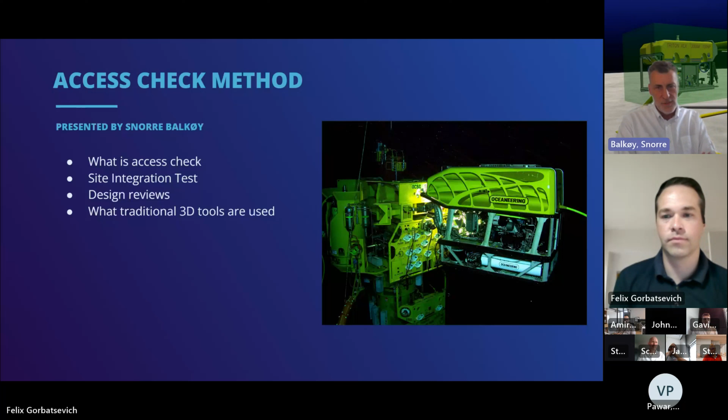What's important to check is that you have the access to get the ROV into the work area, that you can stabilize the ROV, grab on, see what you're doing, and read marking, see indicators. That's basically what the ROV access is all about, to ensure that we have the operability when we go subsea.

Back in the days after we had done the ROV checks in our CAD tools, folding a model around in SolidWorks is not very easy or pleasant in any way, and it doesn't give you a good representation of the access either, because you don't really have the camera, so you can't get the proper view. You don't have the same interaction with the arms. So using a CAD tool was very time consuming and slow, because when you load a lot of models into a CAD tool, it's hopeless to work with.

And then after we did that, we went off to site and did site integration testing with a huge mock-up, lifted around with a crane, usually in tight spaces. It was pretty much the only way to get the customers' confidence back then.

But with the new simulation tools, we're seeing that part of the scope disappearing more and more. And also during the design phase, we use the simulator a lot for design reviews, because it's so easy to jump around with the ROV and show in the simulator rather than trying to explain a picture. That's really, really helpful.

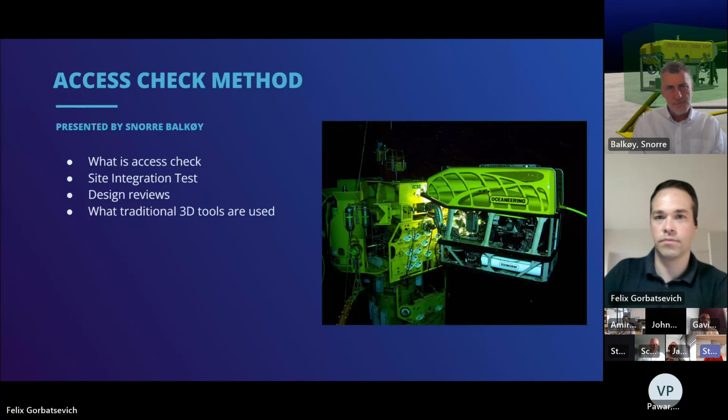So then I would like to say a couple of words of how simulators are transforming this field, and they have been available for quite a number of years now, specifically for design reviews and access checks, because instead of doing things in CAD that is not really meant for navigating ROV around, instead of making things with the hardware mockup and moving an ROV mockup around with a crane, you could have a specialized system meant for engineering reviews, design reviews, flying a ROV around the subsea structure, and actually performing the operations, whether that's accessing certain interfaces, operating certain tools, and so on.

So there's a few key elements in that, and I briefly wanted to address those. One of them is, for example, being able to load subsea CAD models. So, of course, those 3D designs are found in CAD packages, but the CAD packages are not really meant for efficient fly-through of the model, efficient operation, and there's no real physics typically in CAD packages. But the moment a simulator can load a subsea engineering CAD model, that enables one to really perform realistic operations on the actual data, on the actual 3D object. So another essential feature is, of course, steering the ROV itself.

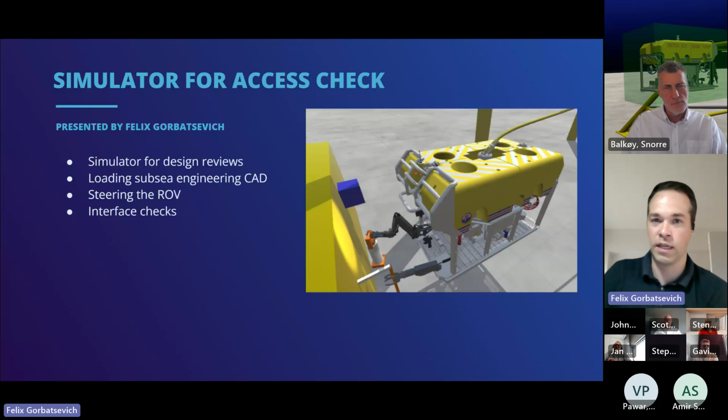I already said something about the tether management system, TMS, in the scene, because tether entanglement is definitely a concern, and you have to be mindful how you pilot and operate your ROV and how you lead it into certain hatches and openings. So it's quite important to support that, to get your tether physically based, so that in tricky situations you can get your tether entangled.

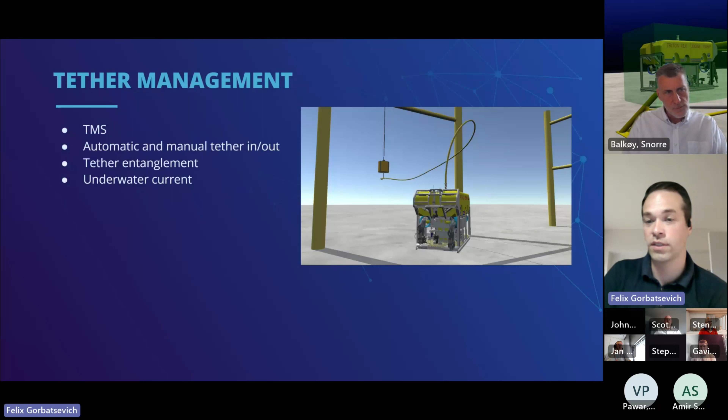So that typically is a part of what an engineering simulator is. And water current, as I said, would affect the tether, would affect some other objects in the scene, and is also a feature.

Physics - now this is where you get probably a lot of freedom in how realistic your scene would be set up. CAD packages by default don't always give all the joints the proper movement angles, and you have to put extra work in the CAD package itself in order to set up your model for movement so that the hatches are possible to open, certain tools are possible to insert.

This is where an Access Check Simulator like this would be instrumental in assigning physics to certain parts of the model, assigning movement limits, assigning collision volumes, and being able to actually physically interact with things. So for the ROV to collide, for the ROV to land, for the manipulators to grab onto the structure, for tools to be used on the structure and such. So it's quite important to get physics when you need to.

I also think Snorre will talk about the balance between how detailed physics you want to have versus how much time you want to use on setting up physics, because sometimes you just want quicker access verification without doing so much time and precise physics setup. But it's important that the freedom to choose how much physics you want to have is there, and then it's up to the specific task - if you need a lot of physics, or if you can get away with less physics being set up.

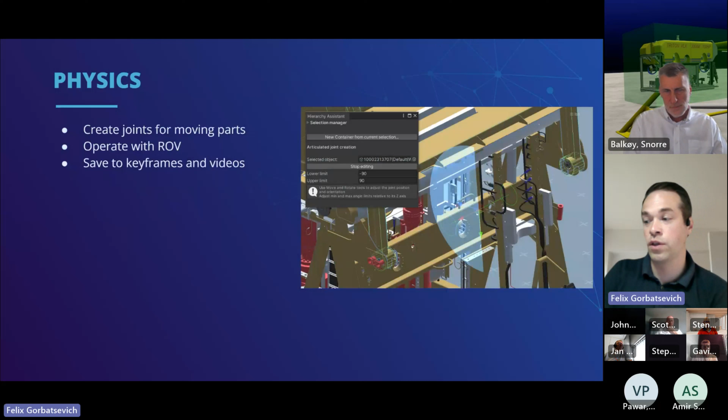Keyframes and videos depend on the format of the work and the output of the access verification. If it's a deliverable to the end client, typically they want to have some images and videos showing how the access will be done, and it's also important to be able to save your operations to a set of keyframes for reproducing later.

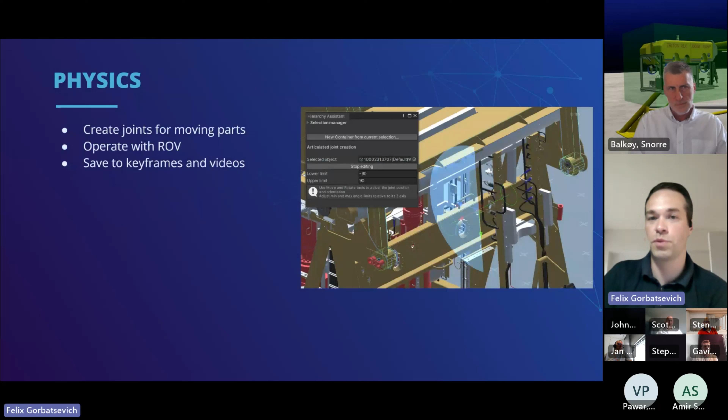So CAD support, briefly - super important to access your CAD, super important to try to maintain as much detail as you want, and kind of size of the fields and size of equipment and complexity. There's a trend that the complexity is increasing, the size is increasing, and the tools have been able to address that. So if you're able to work in your actual CAD and actually update it with each design iteration, that's what you want to have. You want to load your CAD model of your subsea designs, and you want to be able to natively work on this model, spot any problems with the access, report them, get model replaced. So that's a feature that is quite important.

I will not go perhaps into great depths of the model optimization, just because we're still working on finite hardware, and you still need to do some optimization, but there's a lot of optimization that is built in these days, so you can do automatic optimization on a lot of things to make things run faster.

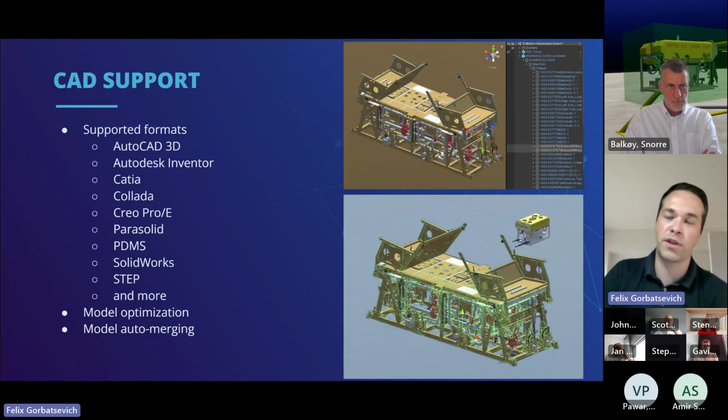Keyframes doesn't sound like much, but it's actually proved to be a very useful feature. When you're talking about keyframes, usually you're thinking of some sort of animation for product showcase. But in access check scenarios, it proved to be quite central in performing repeatable access checks on the equipment, where you would access some interface once, store the keyframes of how that access was done, and then play it back with the updated interface. Keyframes proved to be a very useful tool for repeatability and for saving efforts in the future of repeating the same interface checks again and again.

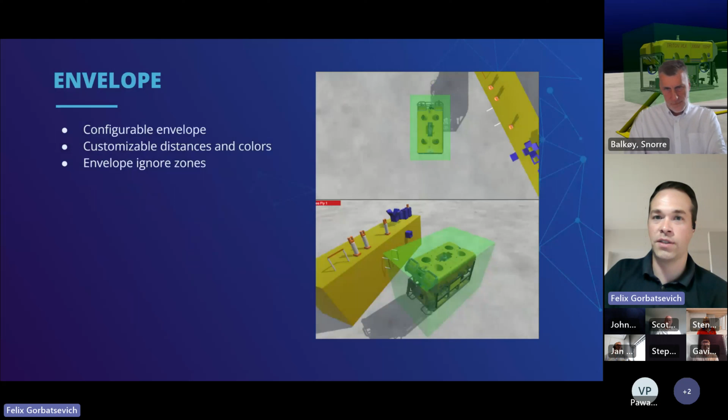Envelope is also a very standard feature in many ROV simulators, especially the engineering ones, where you can have some safety volume with different colors that's sliding differently depending on how much inflation there is.

I'll probably be just concluding on this part by saying that there's a number of ROV simulators out there that need custom hardware, especially the piloting simulators and piloting ROV systems that are meant for full-blown replicas of the panels, interfaces, all the knobs, and they run on custom hardware. We're hearing from some of those companies saying it's really hard to get a replacement these days, it's really hard to upgrade, it's really hard to manage bigger subsea models. That's why we made the choice of making a system that's running on generic PC hardware, off-the-shelf computers, and also so that we would be able to operate it with just standard off-the-shelf gaming controls, because for engineering, that's probably what you're aiming at - something efficient and quick that doesn't break the bank when it comes to controls.

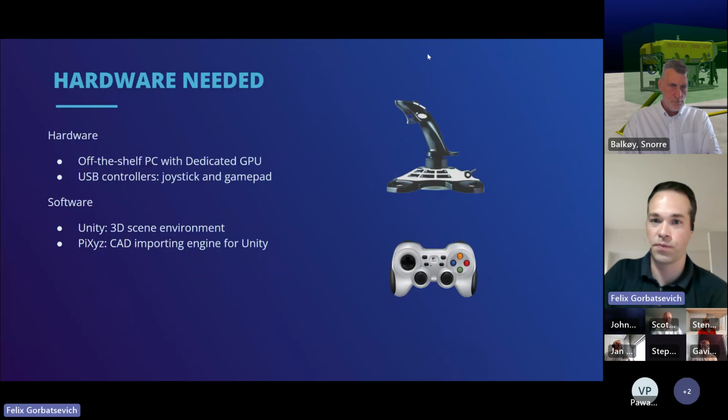So I'll conclude with that, and I'll ask also for Snorre to add his perspective on how simulators change the world of access checks.

Yeah, we can start at the beginning. I remember a long time ago where we had to take our CAD models, ship them off to a third party, wait 8 to 10 weeks, and then get to see something in a simulator. By that time, they had removed 60-70% of the model to optimize it to run in the simulator. Not really any point of running access verification on a model that's been stripped down, because all the details are gone, and the devil is in the details.

We started developing the ROV simulator, Felix, back in 2010 - well, 2008 for an early pilot version, and 2010 when we started to roll out. We were on a good path, but then that part of Aker was sold off, and they took the simulator with them. We couldn't use it anymore, and we've been through a couple of other simulators after that. They've been very limited in performance, not really suitable for our needs. And when we won this big project off the coast of Australia, we realized we needed to do something, because we could not fit the amount of CAD models into any other simulator.

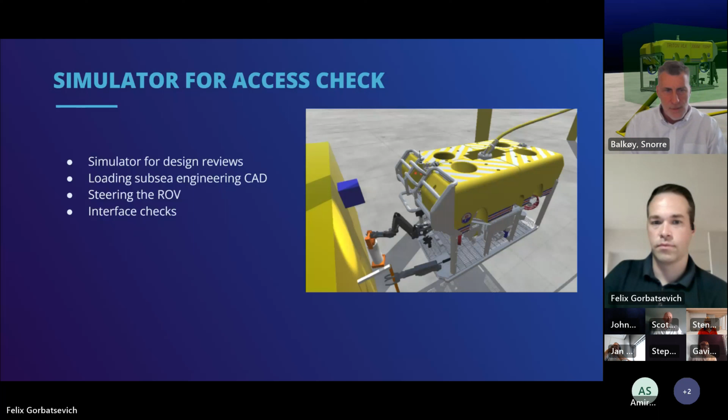Perhaps, Snorre, we could dive into more specifics of how the simulator is used and how you use the simulator features, so we could talk about the specifics of how you perform an access verification on the simulator.

Touched up on it earlier, but when we do access verifications for our designers in a project, it's always to consider the models as fresh goods. You need to act quickly, get the model, put it into the simulator, do the verifications, and get back to the designer so he can do his changes. Instead of waiting weeks like in the old days, now we can do that in minutes.

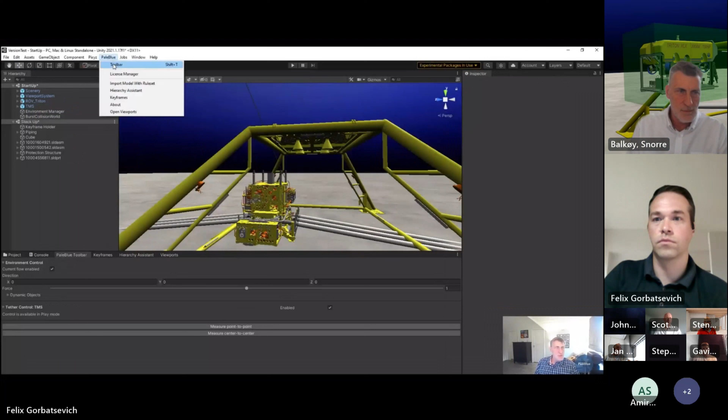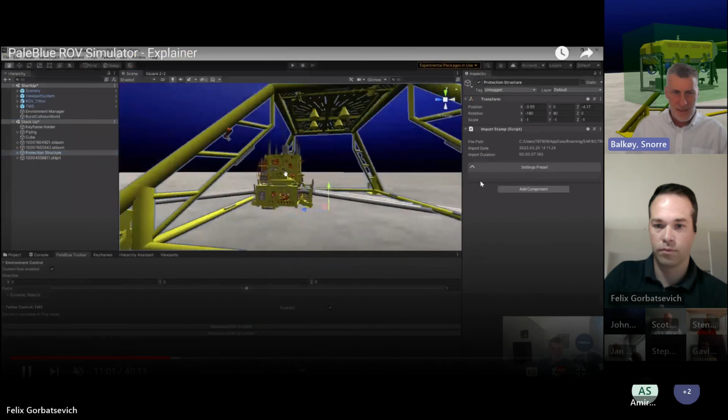Also, in a design process, you reload the same model many times and recheck the same interfaces many times. That's where we got the idea for keyframes, which save a snapshot of the ROV, arm positions, and camera for that specific task. When you have to go back and recheck, you can just click through the keyframes, saving us hours and hours every day. Just that one function has been brilliant, and the fact that we can also use it to create animations afterward is just a bonus.

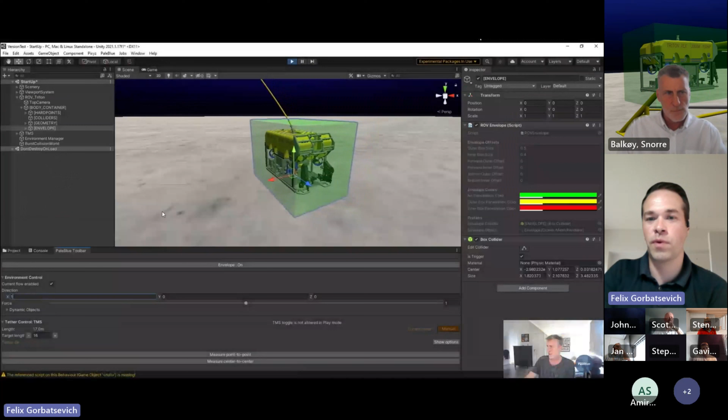Perhaps we could take a broader picture here and start with the basics of how you go about creating a project. What are the main points in that project? How you operate your ROV and how you add your CAD models. Just starting from level 0, in a way.

We start by adding the startup scene, which contains the ROV. Of course, you can have any ROV model here if you have the 3D models for it.

Then we start importing the CAD models, usually building them up so we have a holder folder on top which keeps the keyframes, so we can change out the models inside as they are renewed or updated.

The next thing on my wish list would be to have the physics we put on the model transferred to the new one as we import it. Here, that's not possible to do.

It's all about structuring the folders to make it efficient for the check and for the constant replacement of the models. So very often I take stuff that's standard and put it to the side so it doesn't follow the CAD model, to avoid too much rework every time we get a new model in.

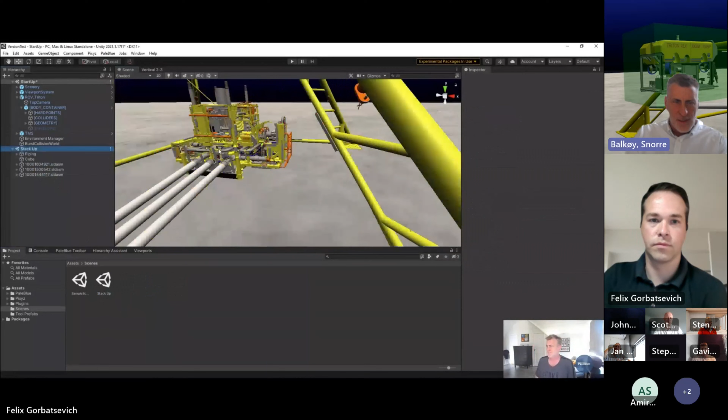It's all rather efficient, and adding physics like for opening hatches is really simple - you don't have to spend much time on it. It's just when you start more complex things that physics takes time, and for me it hasn't been worth putting in the time to do it.

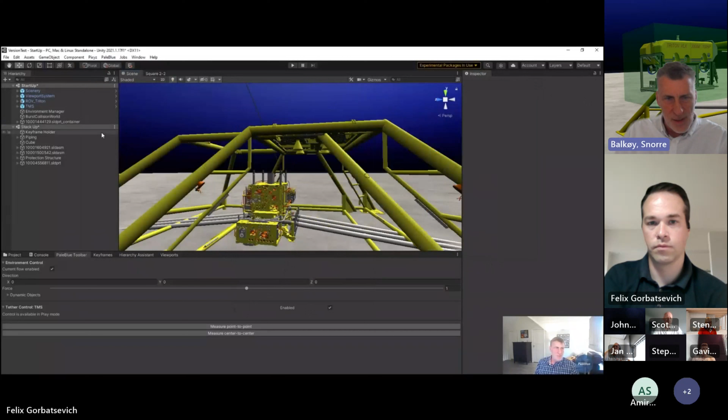Mostly we had a few cases where we had to do more of a proof of concept, and then we actually put in a lot of physics with dynamic hoses and EFLs and stuff like that.

Also worth mentioning, it's very easy to copy a structure or an object as many times as you want without having to load it in again. Just Control D, and you have it again and again and again.

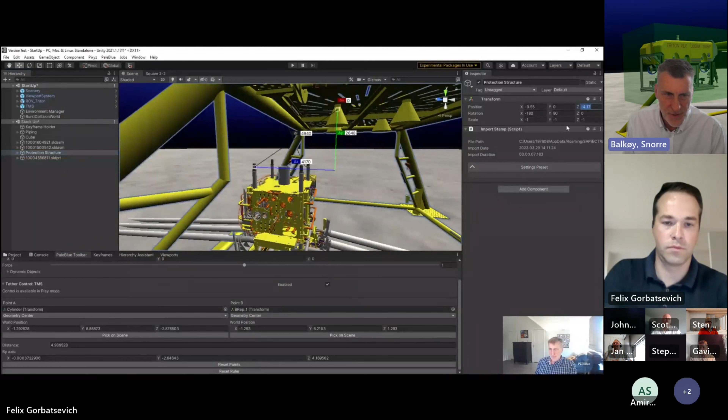Also for standardized products, like we've standardized our tie-in systems and our Christmas tree systems, all these standard components we can now export with the keyframes and reuse them in another project. Meaning I don't have to do much work next time I have to recheck the same Christmas tree in a new structure - it takes minutes rather than hours.

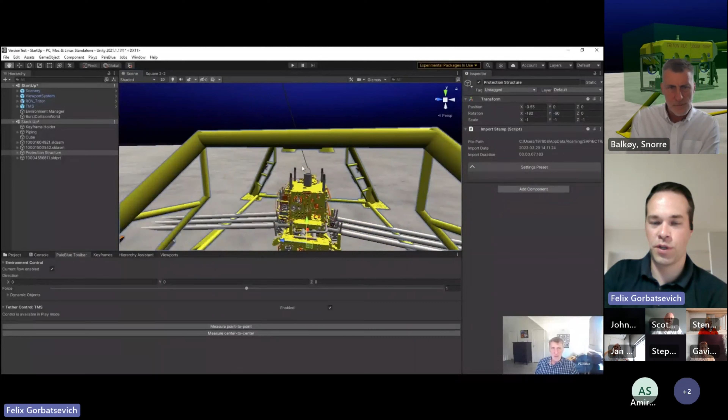Now that we're looking at this demonstration, which you've set up, Snorre, also using the measurement tools - can you say how those are used in aligning objects?

The measurement tools are really good. I wish we had the old Snap to Object feature like we had for the first simulator we made. But I use the measurement tool all the time to position things accurately. It's real simple to use, unless you have a CAD model that doesn't have a surface that's measurable - that happens, unfortunately.

The thing is, you just click on one center and click on another center, and you see how much you need to move the unit, then type in plus or minus in the transform boxes on top here, and it moves to where it needs to go.

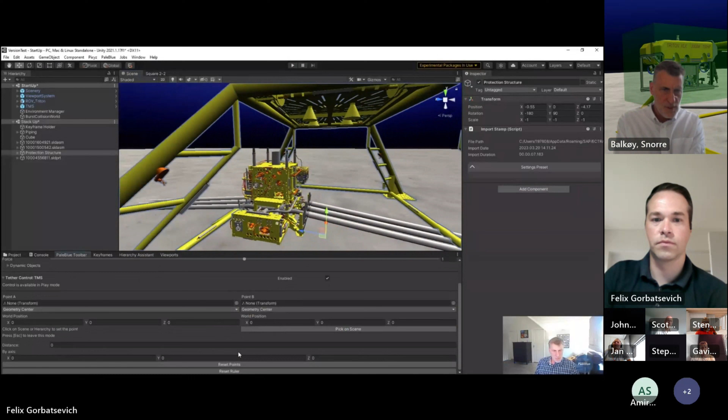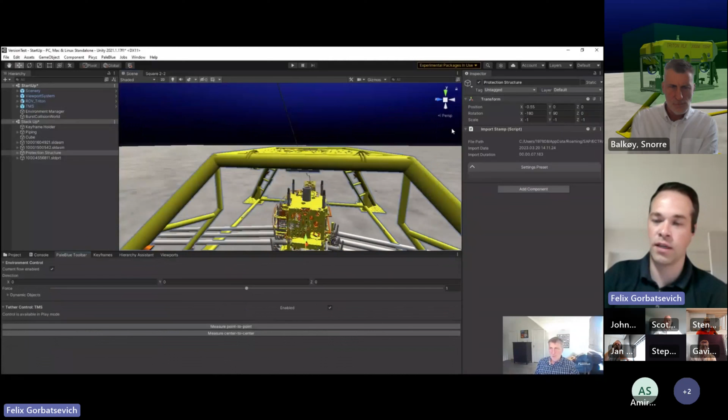Really simple. Once the measurements and the alignment are done, while you don't create physical movements for everything in the scene, would you still create physical colliders for like the main beams, the main structures, so you could land on things and at least get the basic collisions working?

All the bigger structures are supposed to not move, so we make sure to put the static tag on that so it's easier to run. It doesn't demand as much from the software. Then we put colliders on like the frame around it, so we see when we have a collision moving in. Our ROV envelope will turn red when we collide.

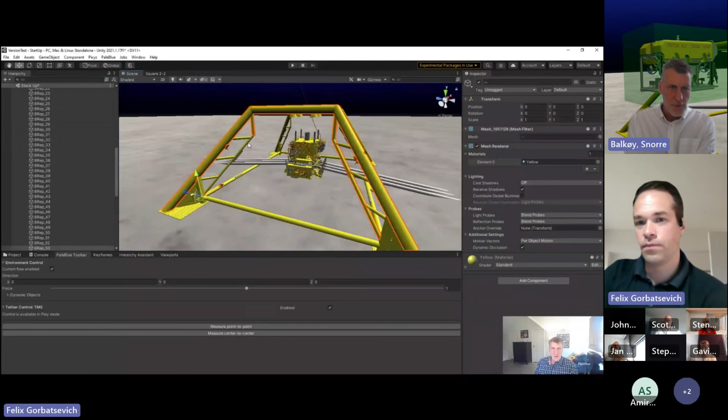And that's useful - you don't have to move the picture around to see all the sides of the ROV. You can just move in and get a visual straight away if you're colliding with something, and then check what's wrong. Sure.

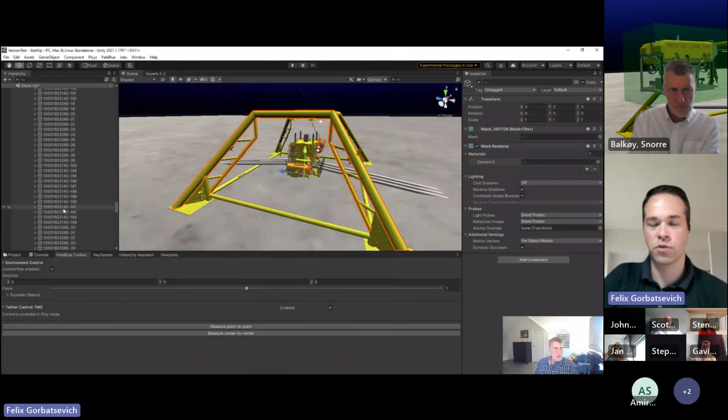So that's creating the collision volumes automatically based on the CAD models, so you don't spend too much time creating colliders - or do you sometimes go and create individual cubes for colliders when you need those? I usually just click on the one that's going to be relevant for the check I'm doing, and then create colliders for that. I know if you put colliders on everything, it's going to run heavier.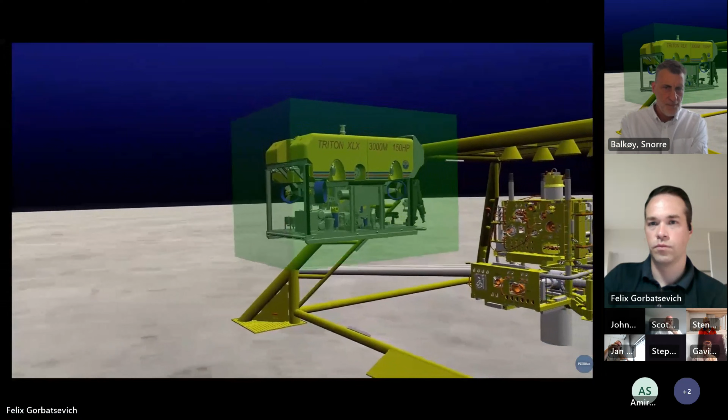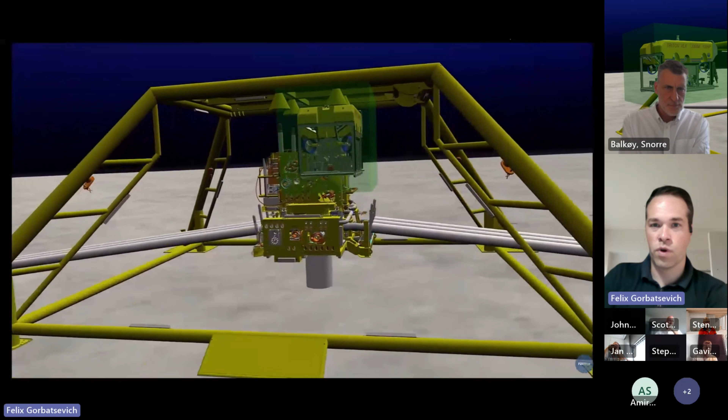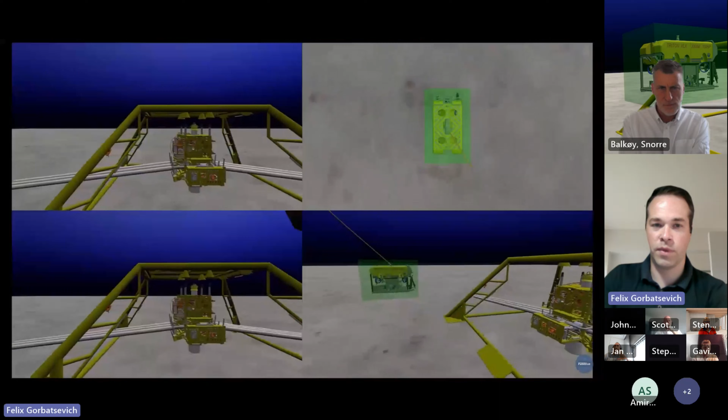So then you have colliders on some of the static structures and perhaps some of the dynamic objects that you interact with when you need that. Okay, so also maybe just explain the notion of the ROV envelope and how that's working, because in this demo you're showing envelope penetration into the yellow and red zone. What's the purpose of that?

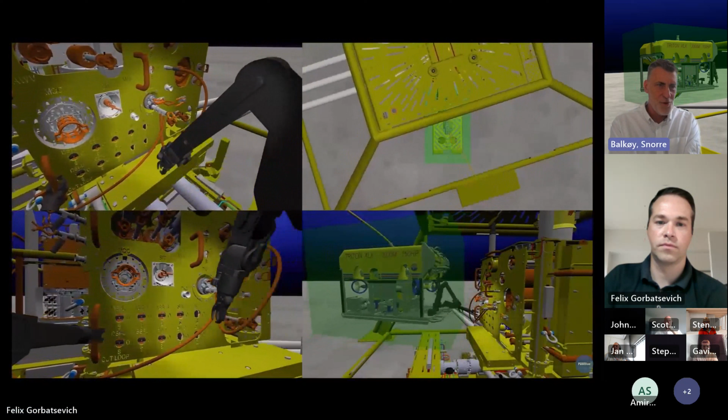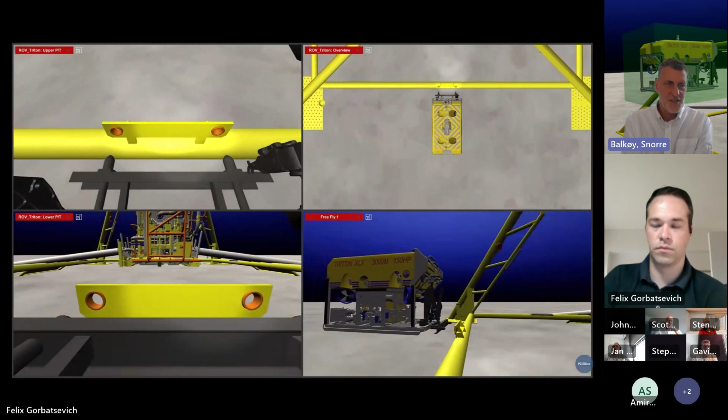Well, according to standards, we're supposed to have 0.5 meter clearance on all sides of the ROV. Now, when we're doing the checks, it's also nice to know how much of a breach we actually have, so we can set a limit, let's say 100 mil. The first 100 mils you breach, it turns yellow, and after that it turns red. It's giving me a quick and easy assessment of how bad the breach is.

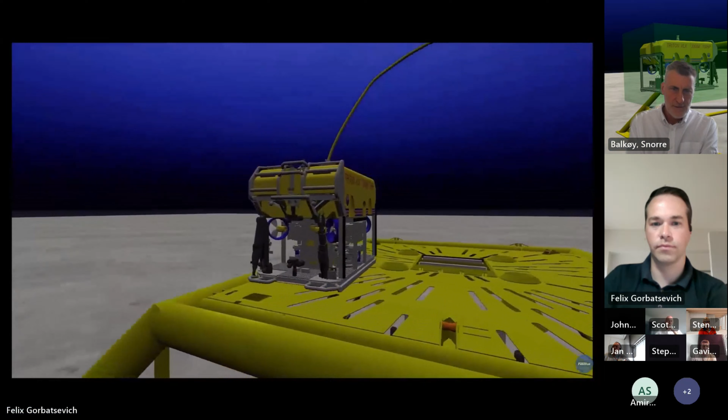That can be adjusted on the fly - you can also adjust the size of the envelope. Although it's said to have 0.5 meter on all sides of the ROV, I think having 0.5 meter in front of the ROV is rather stupid, because you need the space to operate in front anyway, and that's usually more than 0.5 meter anyway.

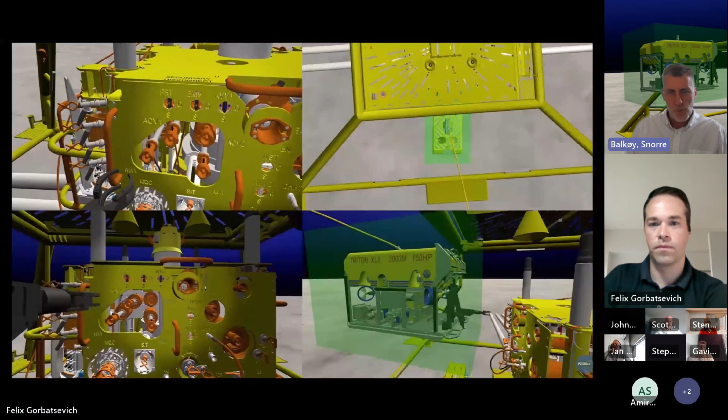So then you set those ignore zones on the front, not to have the color changing when you are operating in something close? No, I either just pull the envelope back to the front of the ROV, so that you don't have that green bit in front, and also the part that you as an ROV operator are seeing and are controlling. Sure.

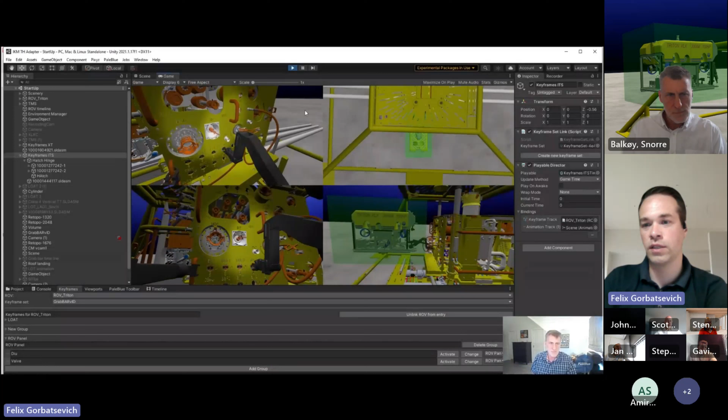Okay, so now that we've been talking about the basic principles, physics and such, you've addressed keyframes as well, and this is something we're seeing here in the product - there's a number of keyframes that are set, and I understand you're configuring positions for the ROV and arms to be recorded in each keyframe. So the panel you're showing here, what's the case - will you get several iterations of this panel and it will slightly change? What's the thinking process behind it?

No, it might change. Valves might be swapped out to other types. They could rearrange the whole panel to fit new stuff into the Christmas tree or other units. So there's always iterations going through the design phase. Instead of having to change or recheck all the interfaces with the keyframes, I can just flip through and see, okay, here's a change, here's a new one, rest is good, fine.

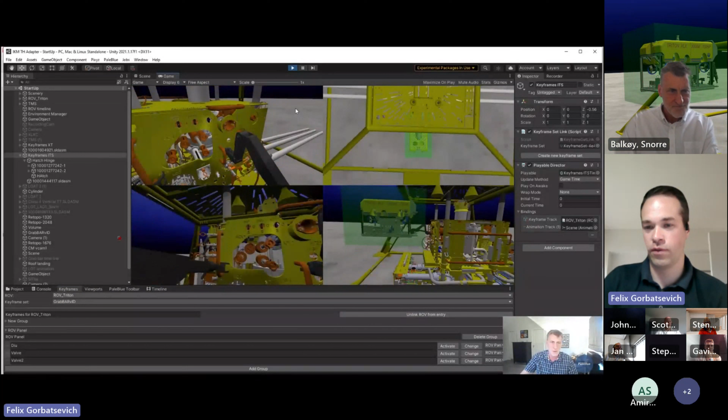Sure, because the alternative would be to pilot the ROV again and again to the same interface, repeating the same operations manually. Yeah, what I call stupid work, doing the same stuff over. The way you avoid that is on your ROV fly-throughs of those operations, you record keyframes, and then the ROV can automatically repeat that over and over with the updated interfaces and updated revisions of the CAD model.

So you're saying it's a quite frequently used feature, that this kind of keyframe access is used very often, is that correct? When I've done a project, I have keyframes for every single ROV task. So I use it for everything.

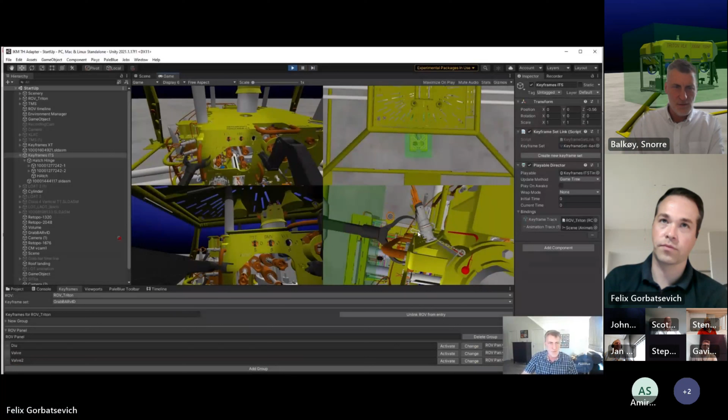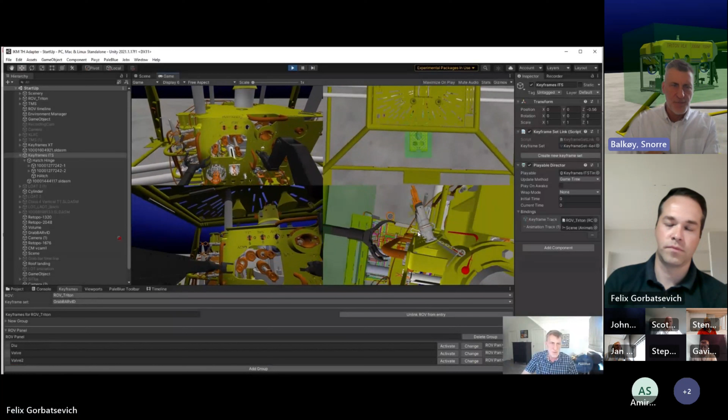And I think you also mentioned that when you created the keyframes, they're bound to an object. So say you have some sort of a Christmas tree, can you explain how the keyframes are connected to it, and how that's beneficial going forward? What we do is create an empty game object in Unity, attach the keyframe script to that, and then place the models as children of that top level.

And then for some reason, if I need to use the same Christmas tree in a different project, I can just export the whole thing with the keyframes, put it into a new structure that might have different challenges, and just flip through and see if changes are needed or if it's okay to go.

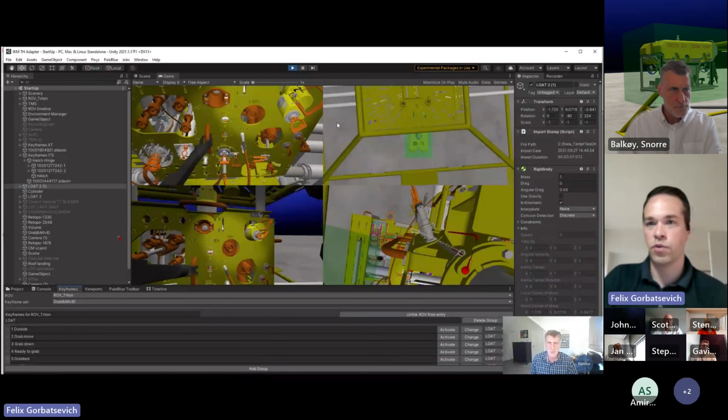Would this Christmas tree that you've created and attached keyframes to be reused elsewhere in the same scene, or between projects as well? Between projects or in the same scene, like if I have a six-slot template, I can just take that keyframe holder and move it to the next slot, then click through everything to make sure it's good.

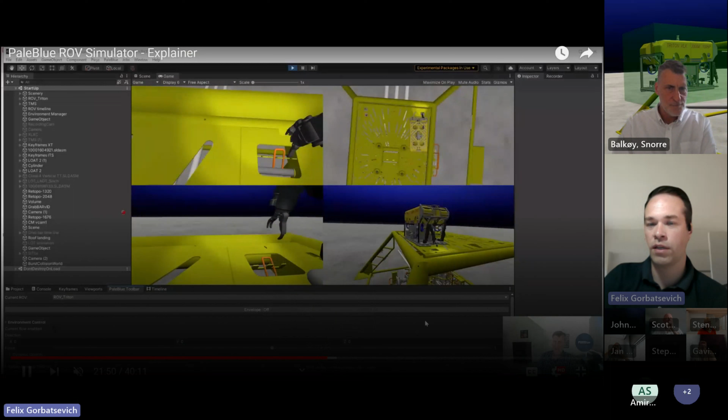Understood. So since we're talking quite a bit about keyframes and animations, we'll get back to animations, but just to reiterate that physics are supported. So if you want to do full-blown physics, realistic operations with full collisions, you have the full freedom to do so. Is that correct? Yes, of course.

It's built on Unity's game engine, right? And you have a lot of functionality in there, so you can do pretty much anything. And I feel like we haven't really unpacked that, so what is it with Unity that makes it a good foundation for you in your work?

When we started developing, we had out of the box a lot of the tools we needed, so it was an easier development to get the simulator in place. And also because the potential that's in Unity for adding physics, for creating animations, for doing full-fledged movies if you want, the potential is there. And if there's something that's not available, it can be made and added.

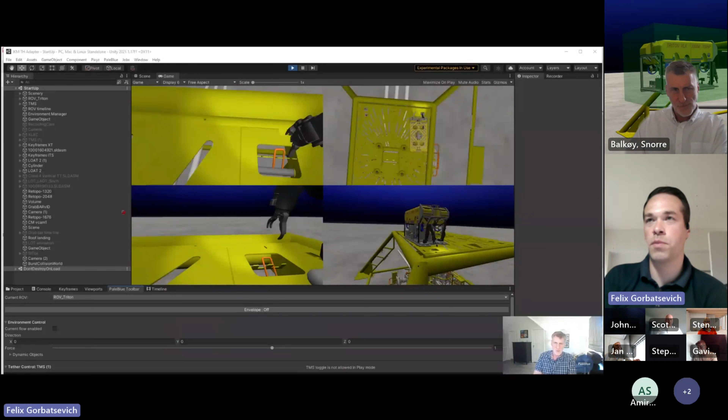That's a very good point, because quite often people ask me if the feature set we see in front of us is it, or can I get another visual effect, another object, another measurement tool. And of course, Unity contains a huge asset store, with many different kinds of objects and functionality bits accessible in there, which makes this system very useful and very extensible, and there's a lot of good content that could be plugged right into your scenes and projects.

And as you started saying, that's not the limit of it. You can always add more yourself if you wanted, you can script things, set up things, configure things. A part of this is, for example, how we address ROVs. For many simulator systems, ROVs are just built in, and what you see is what you get, so there's a big difficulty trying to replace the ROV body or configure it differently.

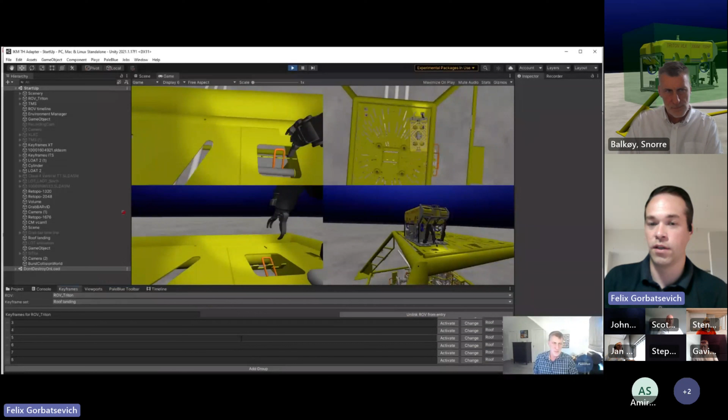While we've taken a slightly different approach, where the ROV is just an object in a Unity scene, and we've made a wizard, so to say, to reconfigure and replace the ROV model also from CAD. So if you have another ROV body in CAD, it's possible to pull in. If you need to configure another arm or another manipulator, it's also possible to drag that in. So I understand that configurability has also been aiding your projects, Snorre.

You know, for me, it's all about the freedom, right? That we can make changes on the fly, we can make anything happen in here, we're not limited to a set framework.

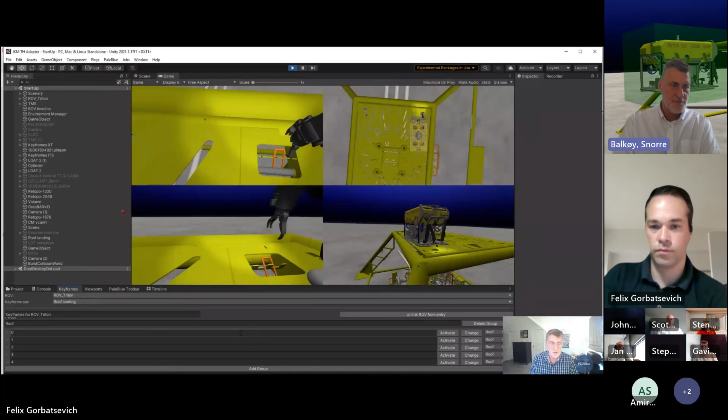That's been really good for us.

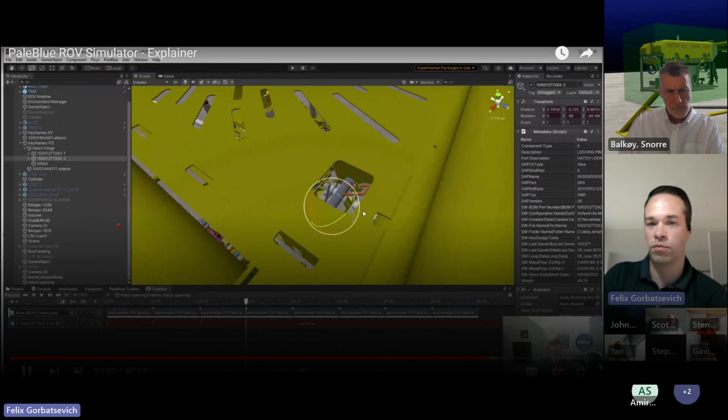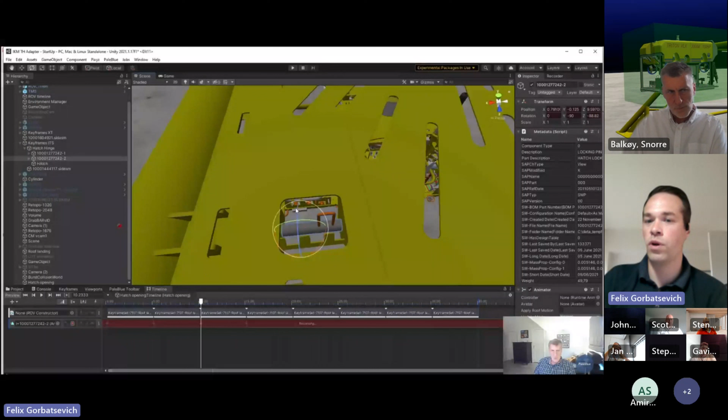So what is the request from your clients, Snorre, that prompt you to create those kind of animations? I understand you're taking keyframes and kind of blending between the keyframes to create some sort of animation sequences out of those. So what's the end goal here?

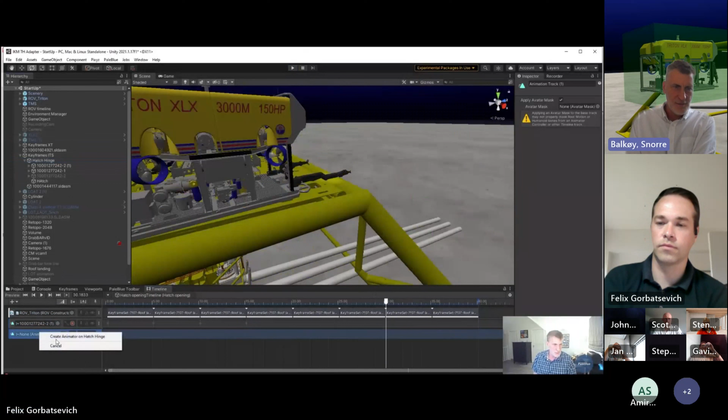To begin with, I just started making some short sequences just to kind of explain to the customers how things were supposed to be done. But I quickly realized that we have all the 3D models in here. We have tools that can make animations rather quickly. Why should we send this off to some animator to do the work? First, having to put down all the actions for him to do, then create special models that he can get to work with. Then you have to prepare these models and then create it, come back to you. You have to comment on all the wrong they've done, and you have to send it back again. It's been a lot more efficient to actually create animations myself than sending them away.

Right, and are you then using the same set of keyframes that you're using for interface checks, or are you creating more specialized keyframes for animation? For the ROV movement, I'm using the already registered ROV keyframes. Okay, so there's no double work in here. You're just reusing the keyframes that you've done for your main. You might add a couple more keyframes to ensure that the ROV doesn't fly through steel between two of them, right? Right, understood. Okay.

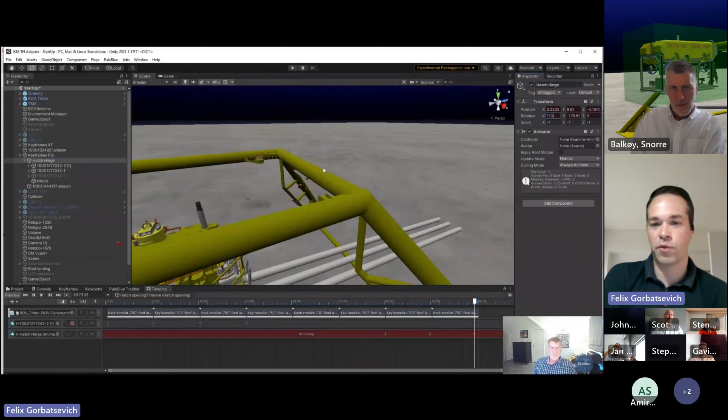I think we've covered a fair bit of functionality in here, and maybe also before we open for questions and a discussion, also to ask you, Snorre, what would be the next interesting extensions of this functionality? Where would you see the system going forward? I know that we've done something for slicing, and that's also a feature that we've recently rolled out, and we haven't been talking about that. But what are the sides? Are you feature complete, so to say, or are there still things to do?

I don't think we'll ever be done developing this, because there's always new features, new functionality you would like to add, right? Sometime in the future, I'm actually dreaming of making myself unemployed by having an AI do this for me.

Wow, okay. So what does ChatGPT think about that? I don't know if you asked the question. All right. No, I was just asking if you already consulted with ChatGPT on that probability. No, I haven't, but you and I have talked about looking into AI. Sure. Right. Okay, this is brilliant.

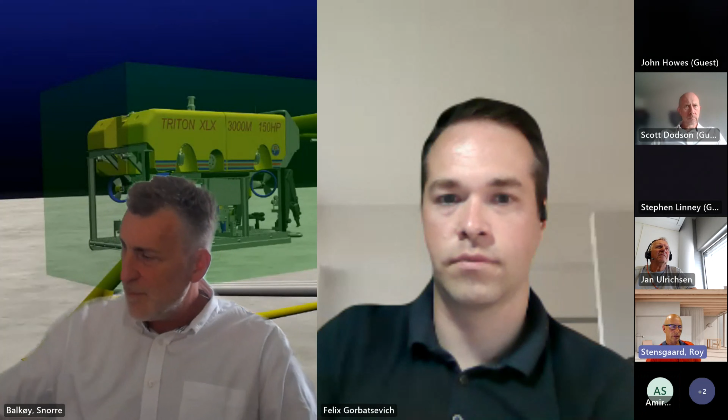I would also mention that when I went offshore some years ago, I had the simulator with me, and we had to show it to the crew on board. That was really helpful because a lot of people joining the boat don't actually know what the next task will be. So we were in the cinema running through a design review, and everybody got another impression of what they should do. We could also focus on special areas needing special care, on the product itself, and for the people on deck. That was really good, and everybody had a good understanding of the job.

Also for working with as-built - if you have a structure that's been 3D scanned, you can just pop the point cloud straight into the simulator and fly around and check it, combined with other 3D models if you want.